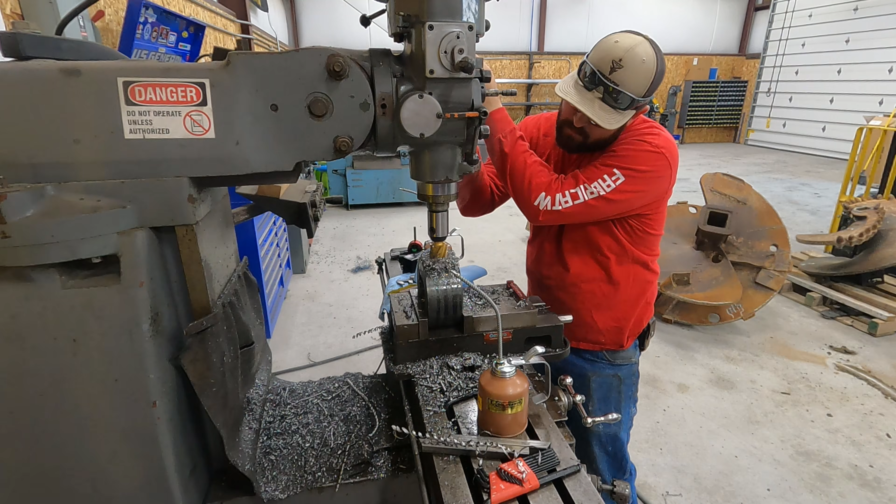So we got some 20-foot lengths of tube here. This is 3x5 tube, 1/4-inch wall, and we're gonna start a pretty big build today.

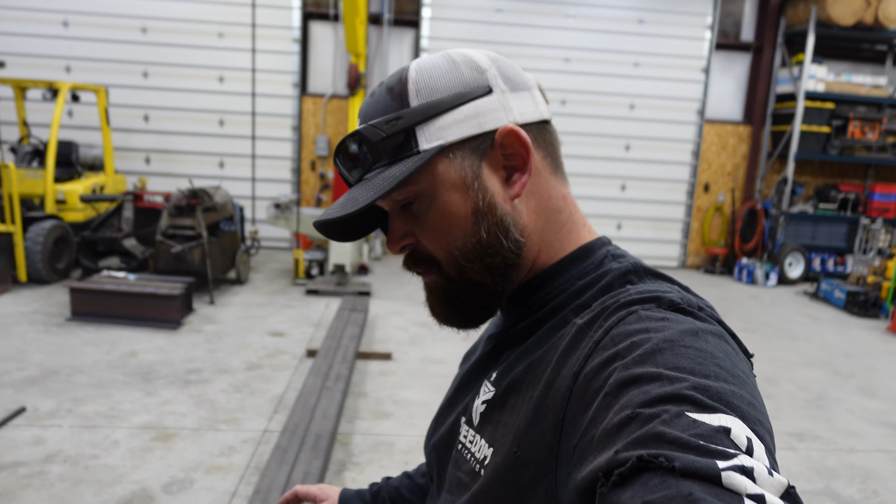This is a project I'm doing for a friend of mine, the same guy I built the wheel ditch filler implement for. He wants me to build him a trailer where he can put gravel or dirt into. It has a hopper and a hydraulic slide gate on the bottom, so he can drag it behind his tractor, open the gate, and fill the wheel ditches. That other implement I built him is great, but those tires track and move the material, so you lose it and end up with a big cavity, a big ditch. He needs to be able to fill material back into that ditch. That's the point of this build.

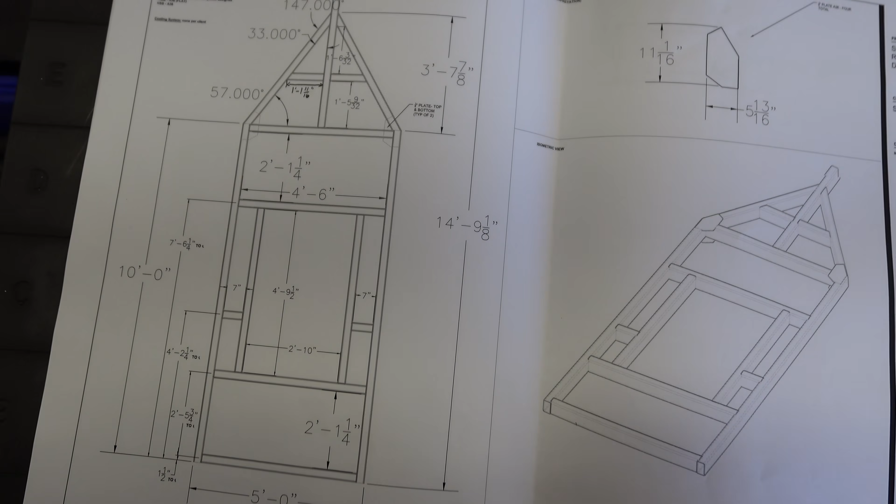Let's get started. We are going to get started on the wheel ditch filler trailer. I've got some drawings here, so that's kind of what we're dealing with. This is what it's going to look like, and I've got dimensions. So all that's left to do now, we're going to treat this just like every other project. I'm going to go through and get a cut list together, figure out what pieces I need, and start cutting parts. Sure wish I had that new bandsaw here, but can't wait, so got to get going.

So we'll go over to the saw and start cutting these.

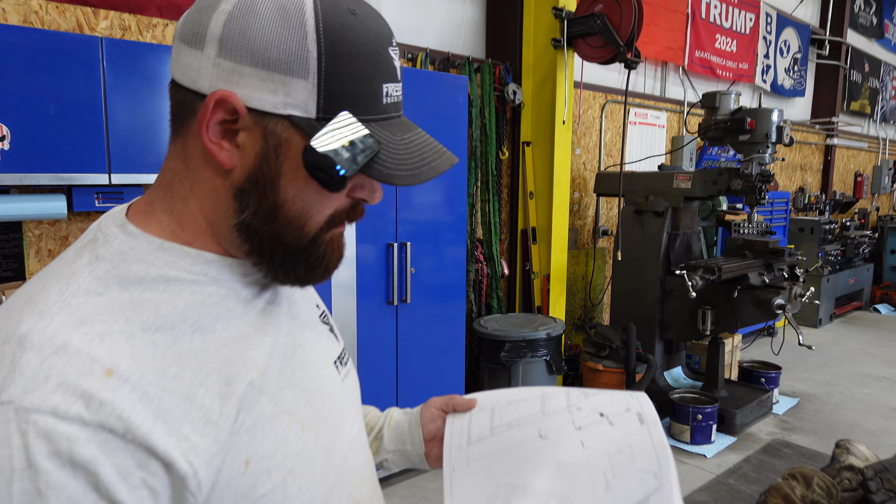Going on, guys, we're back at it today. Let me show you where we're at. We got all of our parts cut, so they're all just kind of waiting to be tacked up. But here's the issue we've run into. You can see that 3D model there.

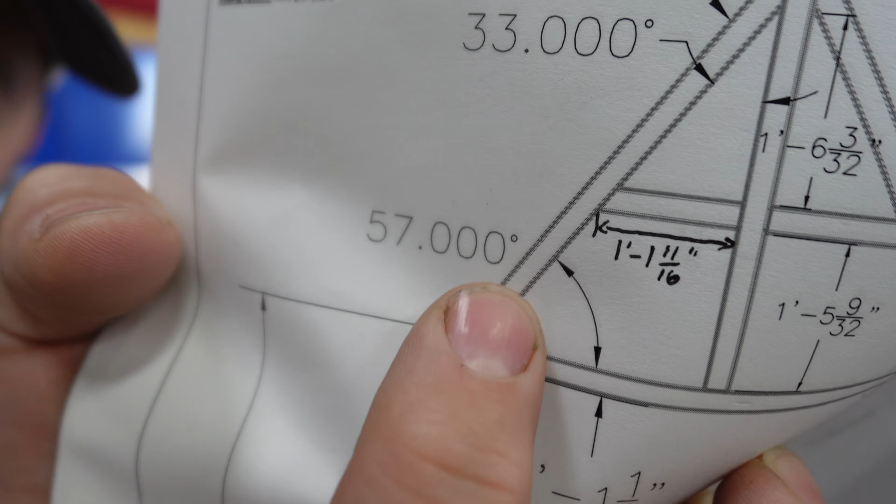If you look at the dimensions here in that drawing, hopefully you can see the way that corner's laid out. They didn't split the angle there. Where this piece meets this piece, that angle's not split. This piece is square, and then this piece has an angle to meet up with that one. The reason you don't want to do that is when this one meets up to this one, you're left with a cavity on the inside because it's turned on an angle, and it would be really hard to fill that in. You can kind of see what I'm seeing right there in the corner.

That's why you want to split the angle. Lucky for me, I was able to draft it up on my software to where they both meet, and I'll show you that, then split the angle. It's a 16.5 degree angle on both pieces. So when the 16.5 degree meets a 16.5 degree, they have a baby, and they make a 33 degree joint, basically. But I'll show you what I mean.

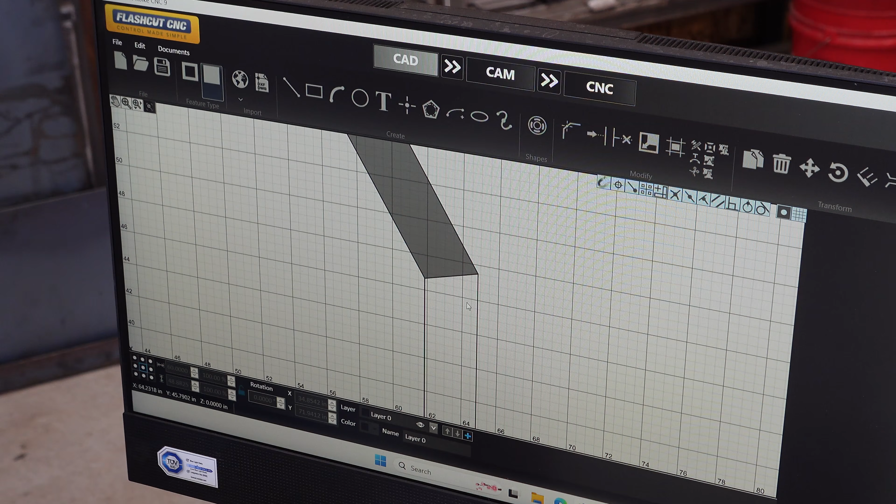So you can see here I've got my side piece, and it meets the tapered piece on the front of the trailer, and they split that angle. So you don't have a square one here with one that has a 33 degree, what did I say it was? Well, heck, I'll just show you. If I was to draft that right now, this kind of shows you. Okay, so I've split the angle. This is the angle, this is what both tubes are going to have. Both this piece and the bottom piece are going to have this 16.5 degree angle, and when they meet up together, that's going to make a 33 degree angle, basically.

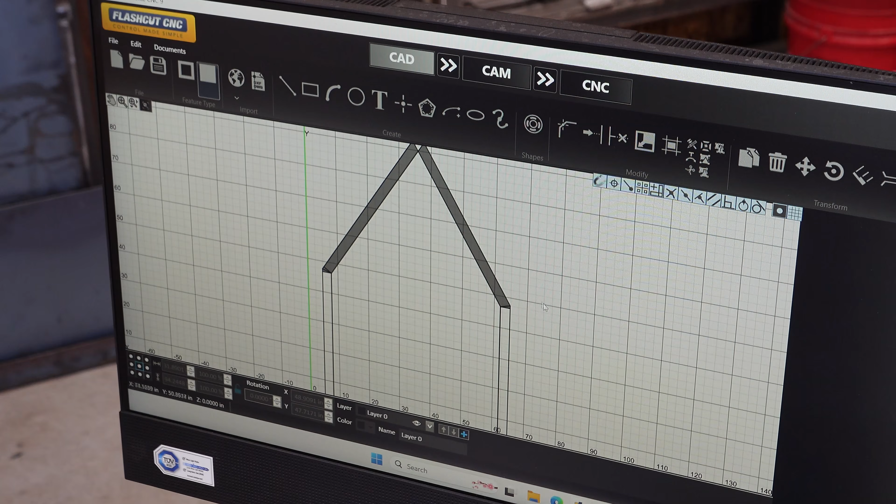Okay, if I was to do it the way it is in the drawing, let me show you what that would look like. So you've got your straight piece and the angled piece. If you only have one square one and one with an angle, then you're left with this big cavity here that you have to fill in.

That's no bueno. Typically when I build a trailer frame, I like everything to be sealed up. You don't want water getting in there because then it can freeze and expand and split the tube. It can rust out from the inside out. There's just a lot of reasons you don't want to do that. You want to seal it up. So we're going to change a few things.

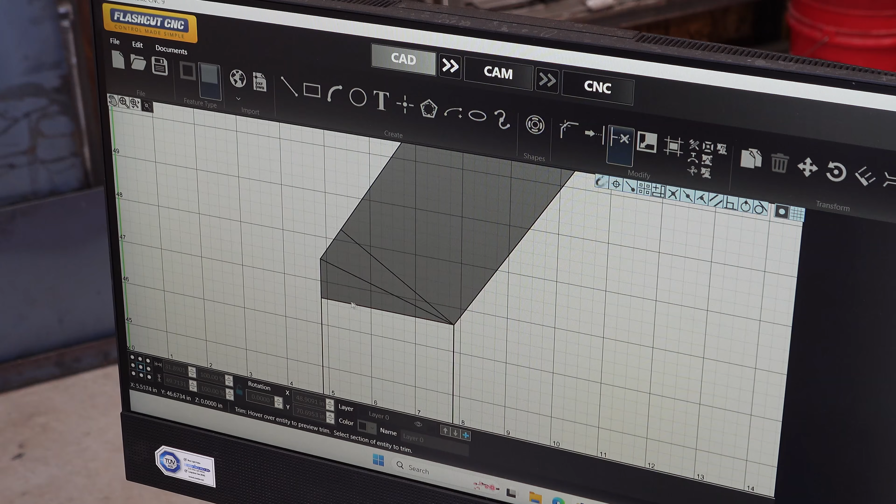This is one of the things we're going to change, and we're going to do it this way so we put the angle on both legs and they meet up and fit nicely like this, and then it will be a lot easier to weld as well.

So 16.5 degrees. Now we know what angle we need to cut these. We're probably going to have to cut that by hand. If I had that new fancy bandsaw, I'd be cutting it with that, but I don't, so looks like we're going old-fashioned.

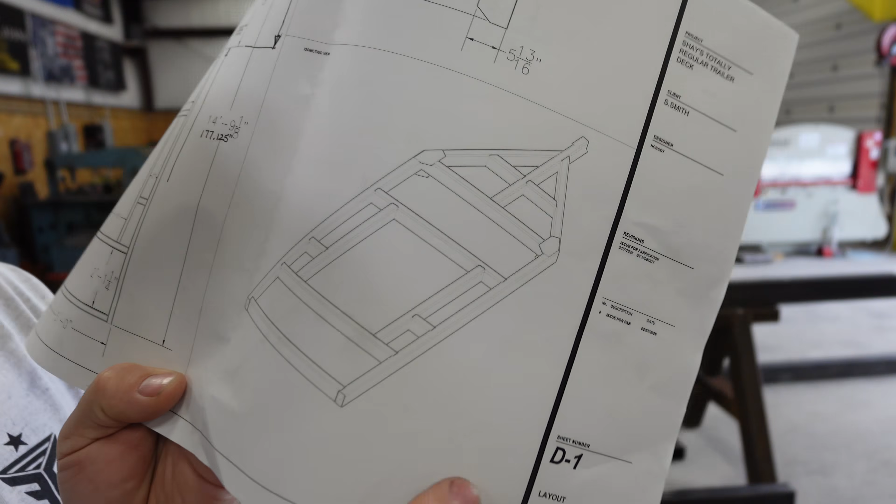Here's another thing we're going to change. If you look at this drawing, the 3D model shows these tubes being open, and this drawing does as well. You can see they just ran the tube to the end, leaving the end open. We don't want to do that. We want to 45 those corners and be able to seal that up. So that's what we're going to do.

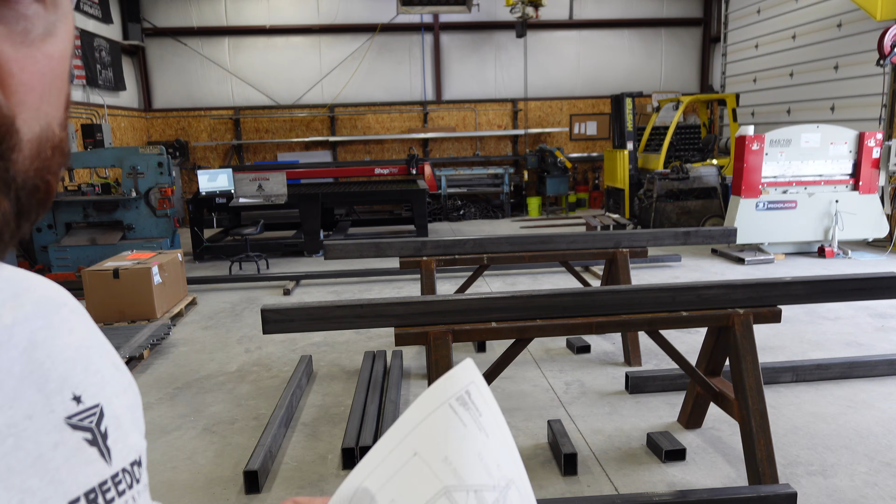I'm going to get set up real quick. I've got a torch, I'm going to cut them with a torch, going real old school. You could cut these with a zip disc, but then you got to listen to all that. I'm just going to cut it with a torch, then we'll clean it up with a grinder. I guess we'll listen to it anyway, but not quite as much. Let me get all set up, and we'll come back to you when we're ready to cut these.

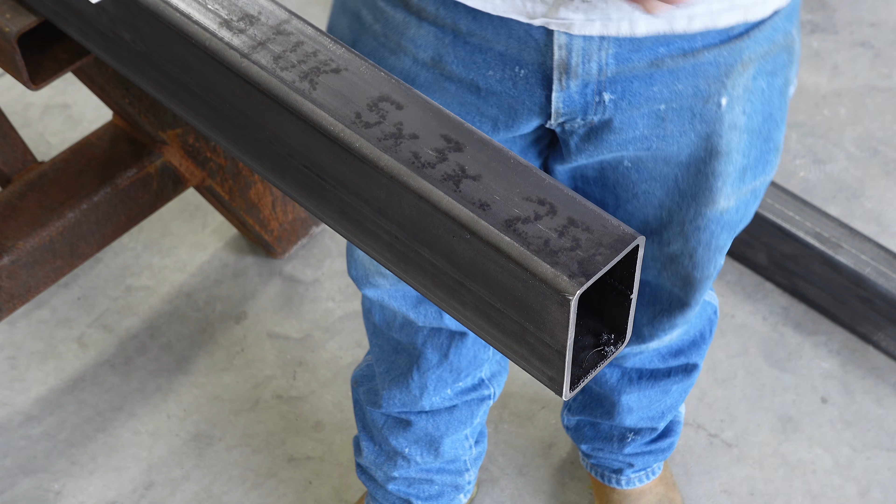I want to show you how I'm going to lay these out. We'll just lay this one out together, and then I'm going to go through and cut them all, since it's pretty much the same process for all of them. We know our angle needs to have this be the long side and this the short side. I've got 16.5 degrees on my protractor here.

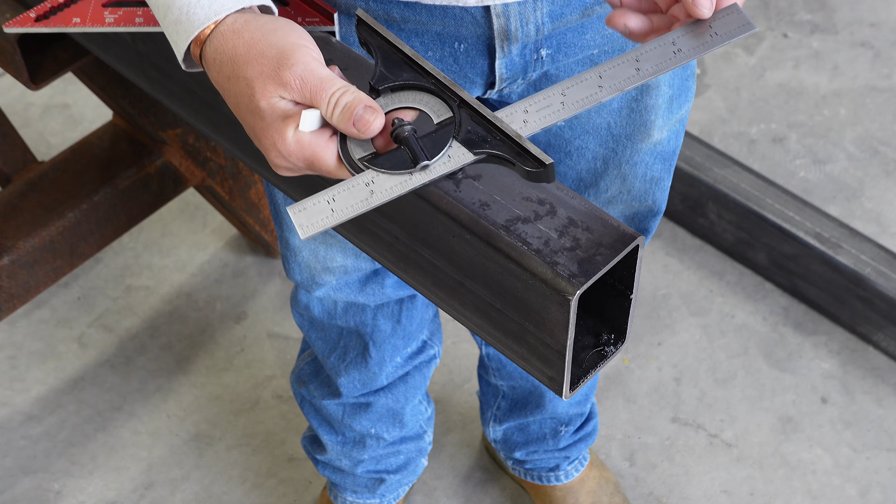So we need to lay this out like this. I'm going to take this and make sure that this edge is tangent with this corner. I take a nice sharp soapstone and I just lay that out there. This is going to be a straight line, so I'm going to lay this out. And then you always want to make sure that you lay it out the same way, meaning you don't want to have one going this way and one going this way on the other side.

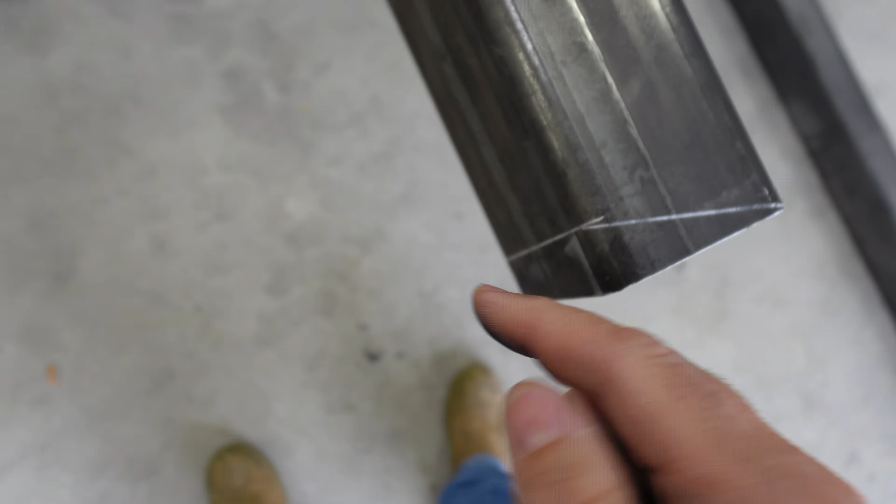So then I'll show you what you're left with. You can see it hits right on the edge of this tube here. Angle comes down, meets up with your square line, and then same thing here. Okay, so that one's ready to cut.

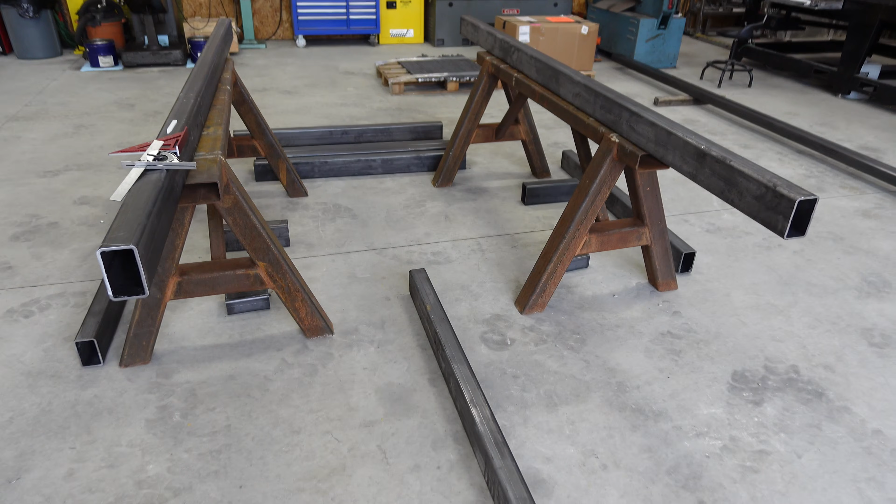I'm going to lay those all out the same way. I'm going to lay this one out, and I'm going to lay that one out. I actually haven't cut the two angle pieces here because I wanted to lay it out on the computer and get a distance, because when you do this kind of angle versus what was on the drawing, that's going to change the length. Now that I have it drawn on the computer, I can pull a measurement, see what these lengths are, and cut those to length. So I'm going to also do that.

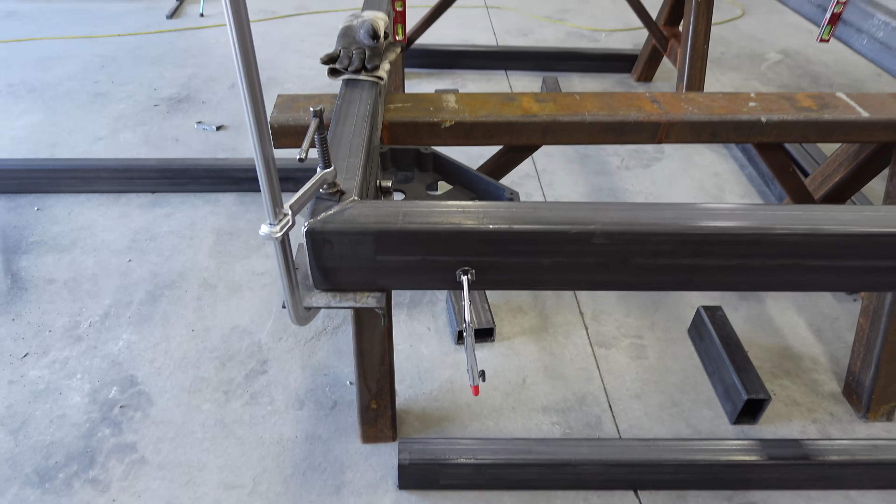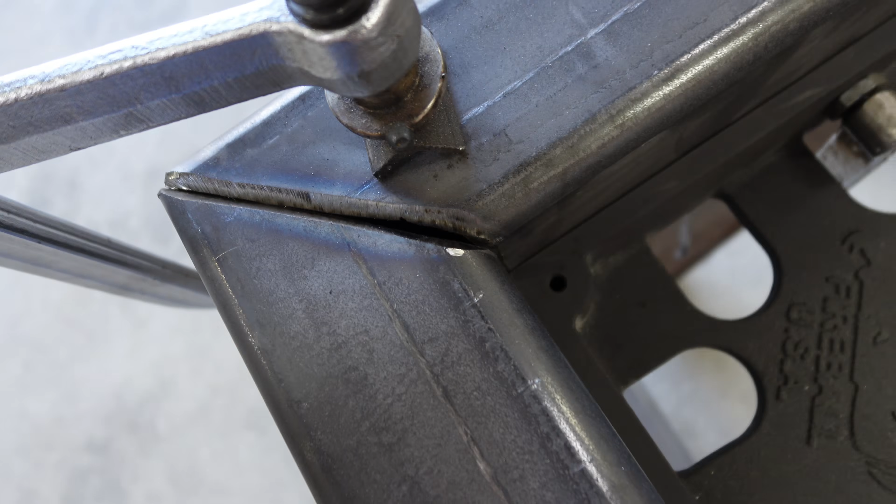Starting to fit this frame. You can see I've turned my long pieces on the sawhorses. I got a couple pieces of plate clamped to the bottom here, got my trusty fireball square there, we're going to use that to fit up these corners. Getting some pretty good joints. You can see there's a little bit of gap there, but we'll be able to fill that.

I got some levels on it to make sure everything's level. These sawhorses aren't going to be perfect, the floor is not perfect, so there's a lot of variables here. We're going to go ahead and keep everything level, and check everything to avoid twisting this frame as we fit it. We'll just kind of work our way around.

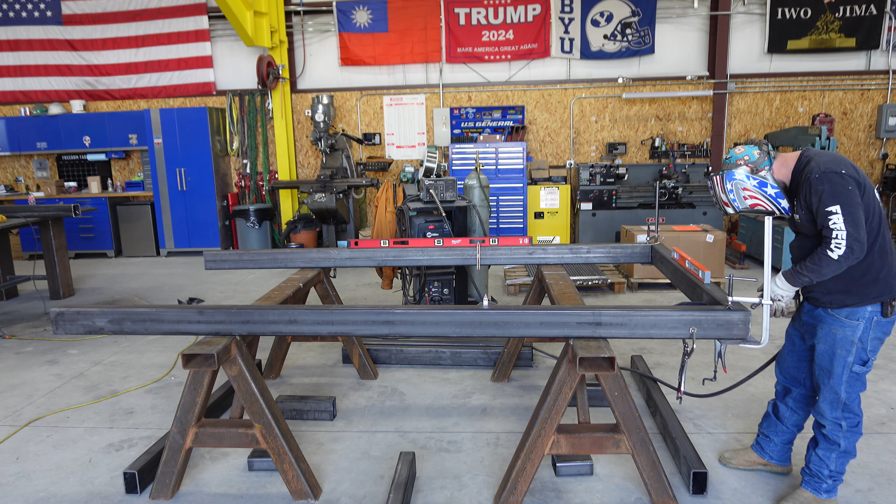Put some good tacks on it. Sometimes I'll use these little brass wedges to level things up if I need to.

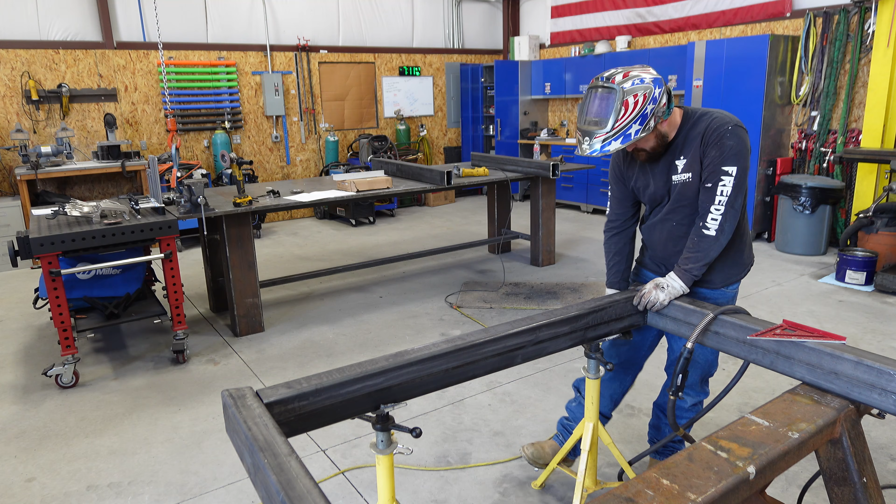Alright, so here's the next one that's going to go in place. It's going to make it kind of tough to get this welded up on the inside, but I think we can still get to it. I do want to get this in place. I'm going to hold it back just a little bit. I don't believe this is a crucial measurement - I checked the plans, this can float just a little bit. All it is, is a cross brace.

So I'm just going to get a tack on it to start. There we go, tack the same side. The other thing I want to check is straight up and down. A lot of times when I'm fitting iron, I like to use a dead blow hammer because it's not near as hard on your ears, but you can still get things to move pretty good.

Alright, we got us a rectangle. Now I need to go around and check my levels, make sure nothing's moved. This is still good - okay, everything's looking good so far.

Now we're ready to start fitting the tongue. I'm going to grab some more pipe stands, we'll set these two in here, start finagling these. Alright, so now we're working on the tongue. I've got a level on it. Clamped a piece of plate here, so I've got my tongue piece set on that plate. I've centered this.

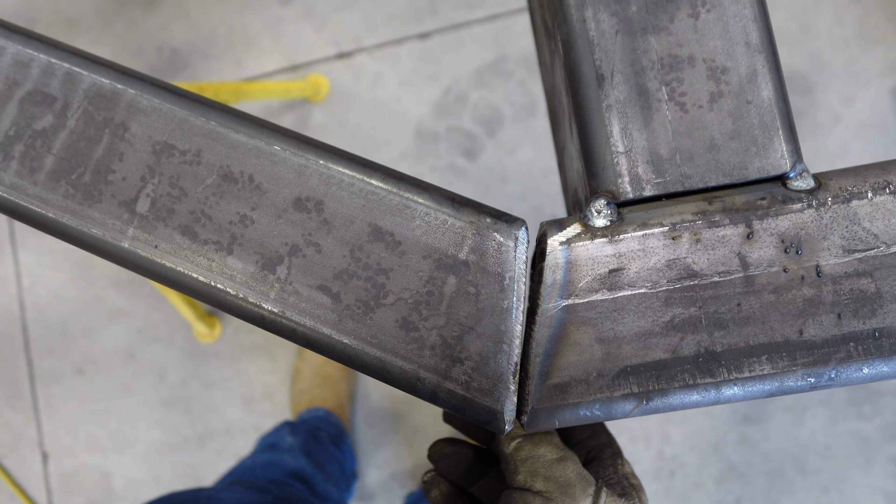Alright, quick update, let's show you guys what we got here. We are going to have to correct an issue, so I'll show you guys what we got. Okay, so we got these angle pieces in place. Now if you look here on this end, you can see there's a gap on the inside right here. And if you come down here on the heel, you can see the heel is touching, but it is not here.

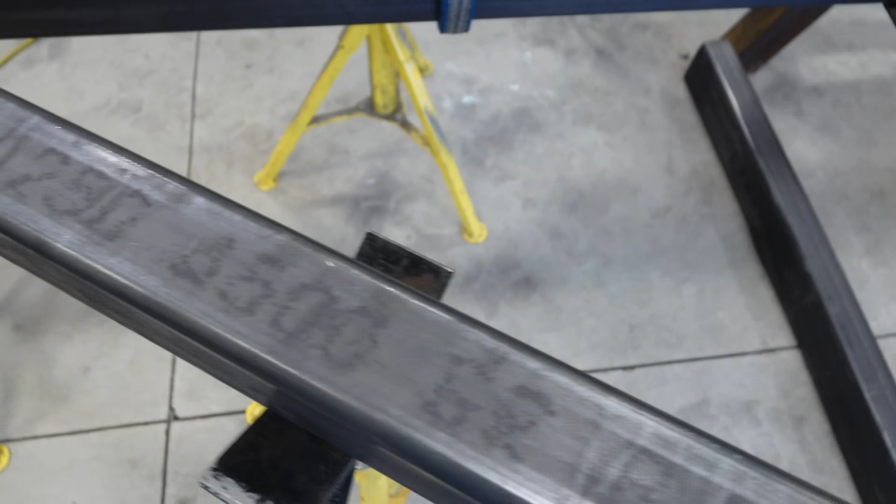So I'm going to take this distance, what that gap is, and I'm going to trim it down on the heel, and it's consistent. This one's the same way. Okay, so the heel hits, there's about a quarter inch gap there. Same thing there. Now the good thing is, once I trim that heel and make this parallel, when I close that up, it's also going to close this gap up. So hopefully that'll fix it.

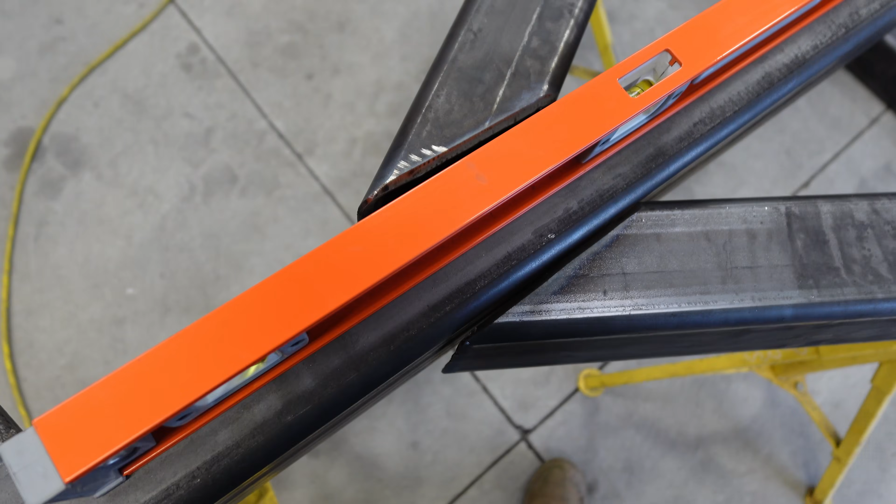So I'm going to get the torch out. I'm going to whittle this off on the heel side here, and then I'll go ahead and clean it up with a grinder, and we'll come back and show you guys what it looks like.

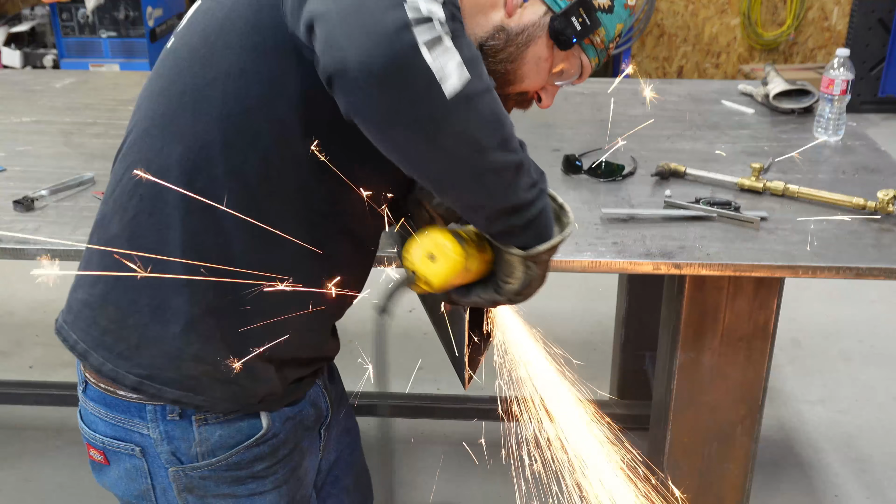Okay, we've got this in place. It did close this up a little bit. Still a little bit of gap, but it's weldable. This side looks beautiful.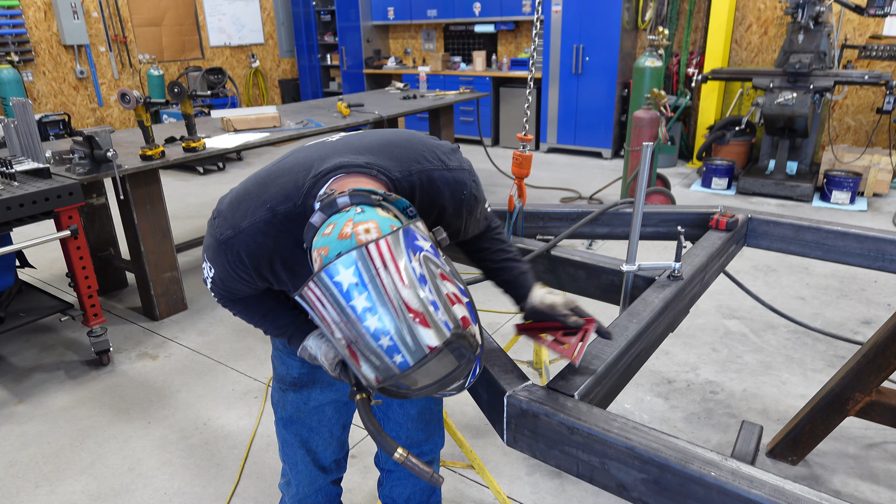Alright guys, you can see we've got these two internal supports tacked in place. I'm working on getting these smaller ones tacked in place. It is snug as a bug in a rug. Whoa - until you get to the bottom.

I'll tell you what, if things don't work out with the farming thing, I'll bet the circus would hire him out. He could haul elephants with this sucker, because it is built. This thing is built for some weight. Just the frame alone is freaking heavy. It's the first piece I haven't had to trim or grind.

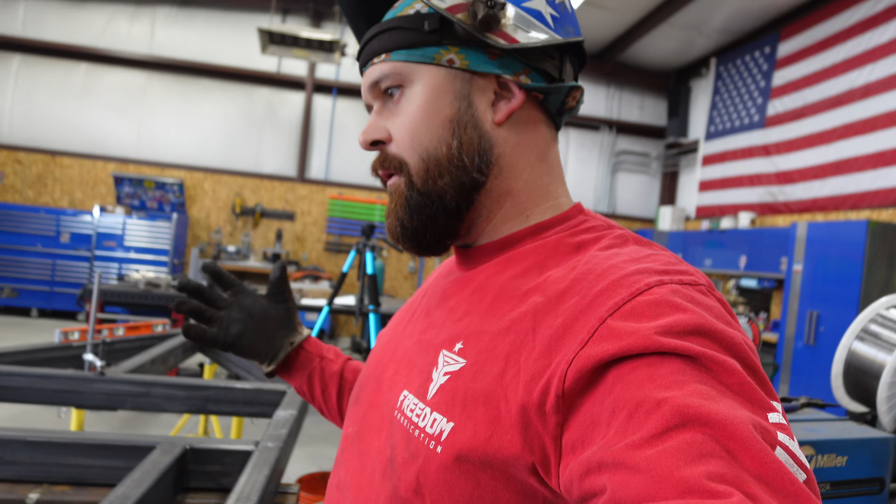Alright, something else I want to throw out there. I know I've brought this up before, but I'm going to bring it up again. So when you tack something like this, it's always a good idea to put your tacks where you can get a zip disc into, in case you need to cut it apart and shift something or pull something back square or whatever. I know, because I've had to do it way too many times. If you put your tacks where you can get to them, then it's not as big a deal. You can hurry and cut your tacks, pull things back square, retack it, and keep rolling.

But if you even put just one tack in a bad place where you can't get to it, now it turns into a whole fiasco. Because one tack can hold things a lot better than you think. So just make sure when you're tacking stuff like this together, you put those tacks where you can get to them - always on the corners, so I can get a zip disc in there.

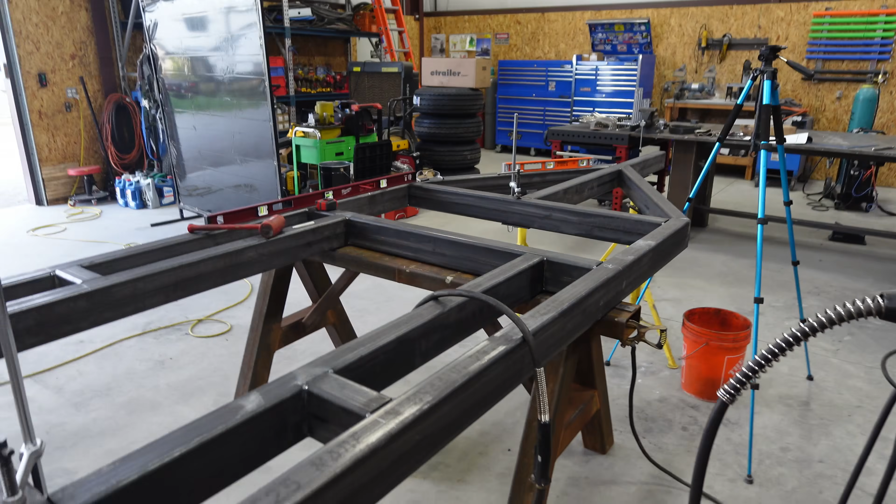Okay, so the next order of business, I've got two supports that go in the tongue here. I mean, I'm telling you guys, this thing is built. So there's two pieces that go in here, and I'm going to have to miter the piece that butts up against this support. So we'll get those all prepped up, and then we'll come back to you.

Alright guys, I figured this was probably worth showing. For something like this, if you wanted to put a support in here, you need to figure out this angle.

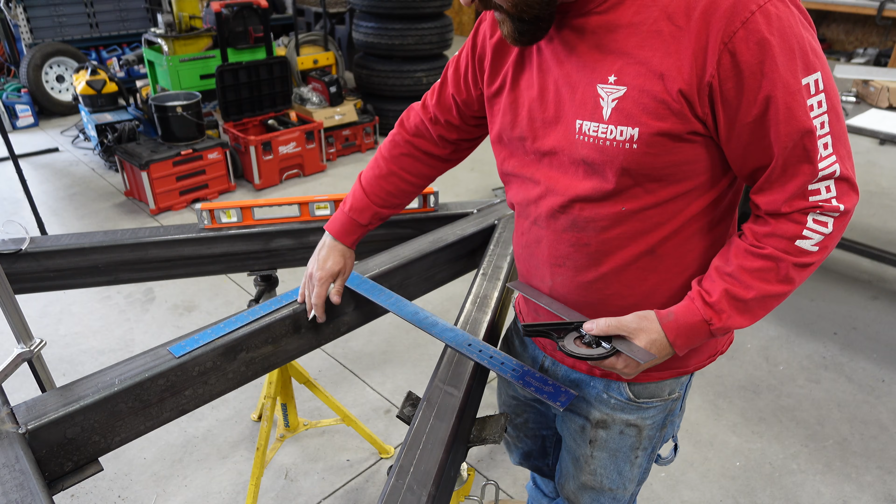This is the way I figured it out. There's lots of different ways you could do this, this is just the way I decided to do it. So I held this square here. You can do it either way, hold it square here or here. So I held it square.

Then I took my protractor and held it up against the square, and I was able to check and see that the blade on my protractor was on the correct angle. So I just lined it up with the inside of the tube here, carefully tightened the screws, and ended up getting 32 degrees. So this is a 32-degree angle off the end.

So now we can go over, mark our tube with our 32-degree miter, and we'll be able to cut that and slap those in place.

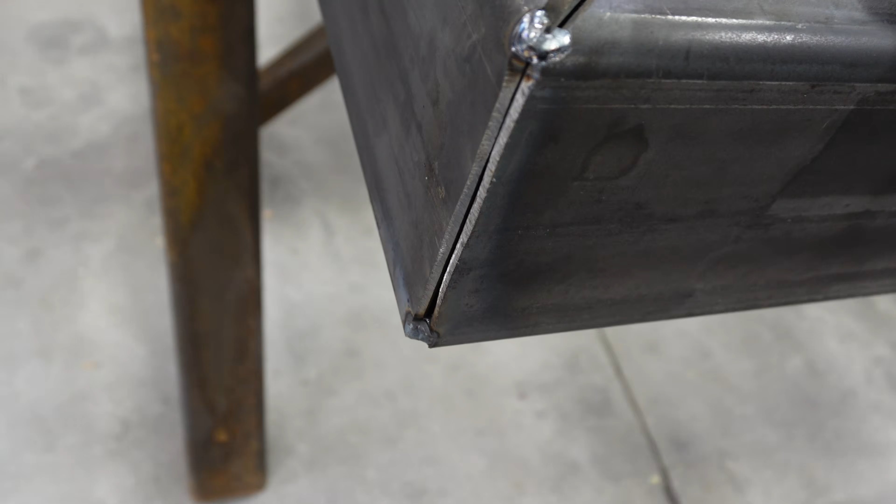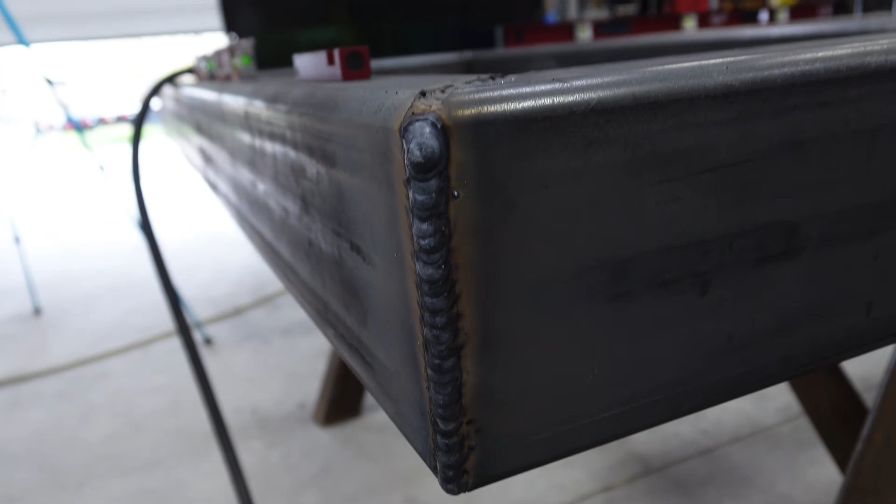On these outside corners, that one looks pretty good, pretty tight, but I'll trigger that one up as well, and then maybe clean it up with a flap disc. If I still don't like how it looks, I'll run another one over the top, and I'll trigger it. But it ends up looking pretty decent. Here's one that I triggered, so you can see it gives it a stacked dime look, and then I clean it up with a flap disc. That's how I handle that type of situation.

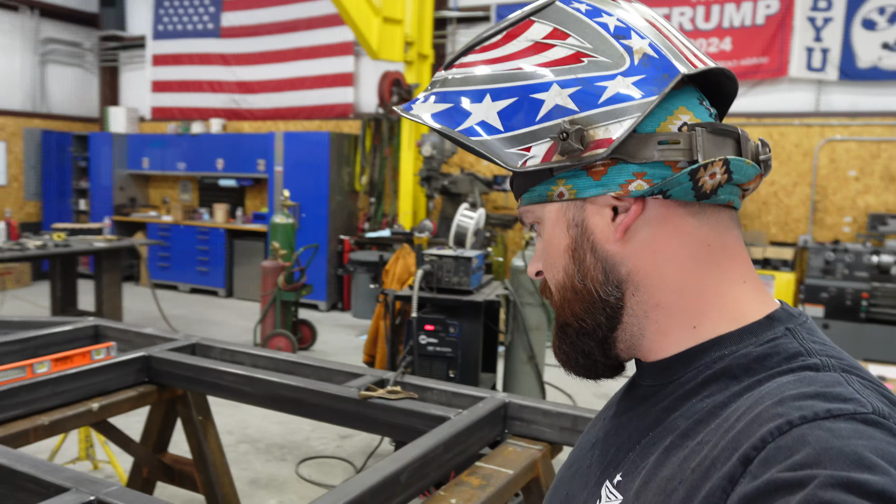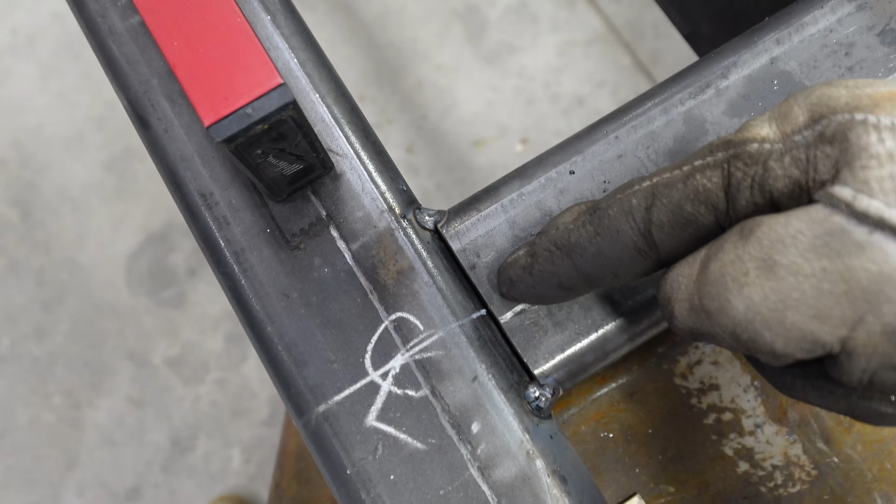Dealing with gap is something you're going to run into. When you have a T-joint like this one with tube, the way I run these is I run one on this corner. I tip my gun this way and favor this tube, because it's not going to blow out if I'm directing my heat here. Then I let it wash into this. Typically that's not enough to fill up this joint, so I'll angle the gun this way and run this one. If it's still a little concave, I'll run another pretty one over the top of it. So I just wanted to give you guys some info on how I do it.

I'm going to throw on the meta glasses and see if I can video how I run this one, and hopefully it'll be clear enough that you guys can see it. Let me go grab them and we'll show you guys.

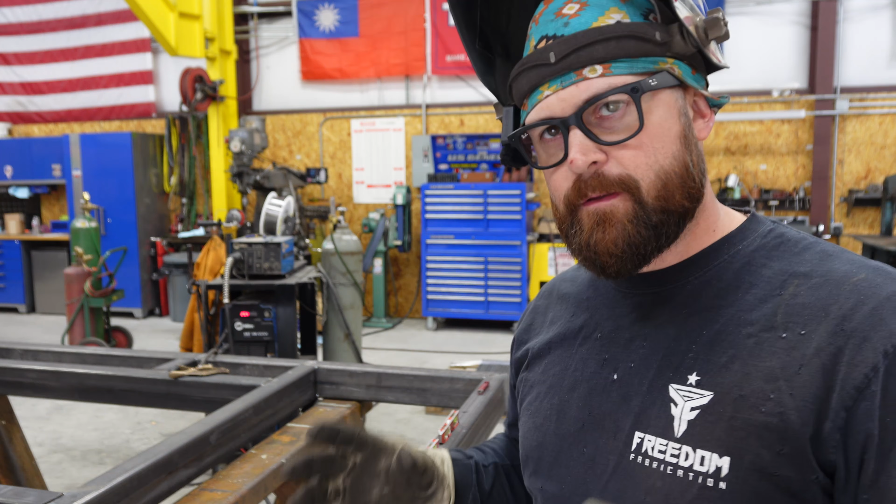Okay, so I got the glasses on. The only way you guys can really see what I'm doing with these glasses is if I have a brand new lens in my hood, so I've changed both lenses, inside and outside. Hopefully it's clear enough that you guys can see what I'm doing, so we'll see if we can get some video of this.

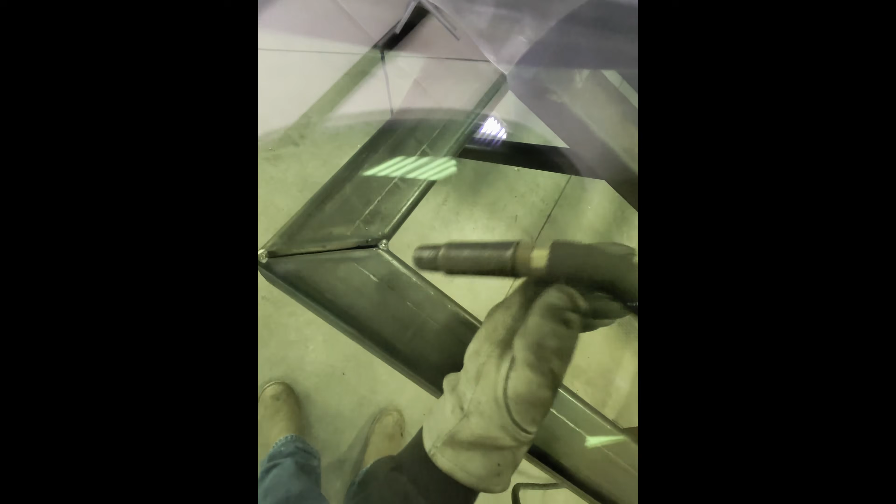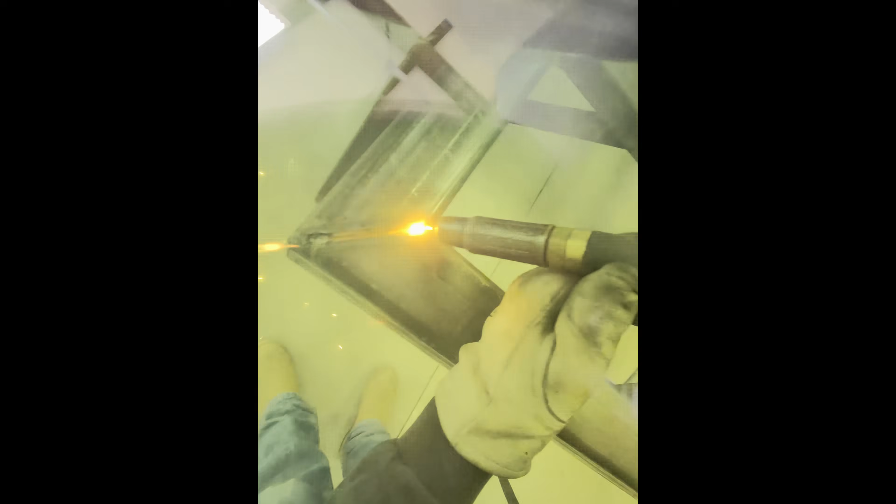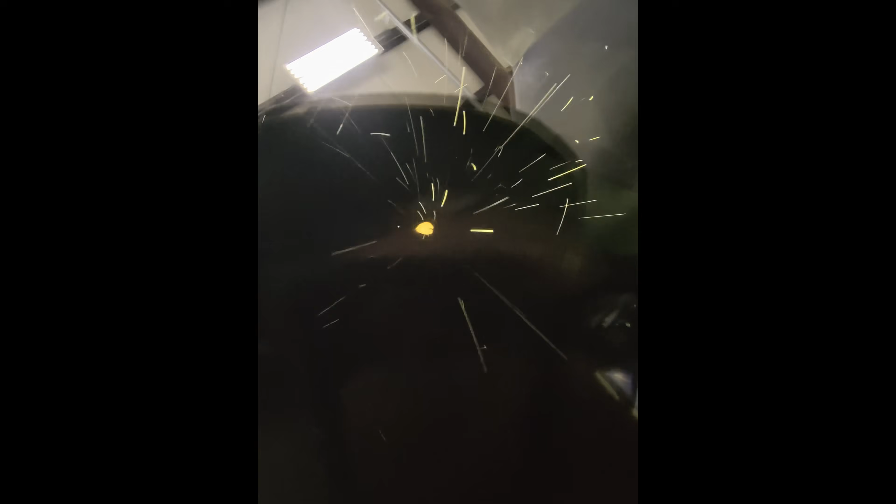Okay, so I'm just going to start here. Put a tack, put a tack, put a tack, put a tack. See how it kind of gets really close to blowing through? That's why I just trigger this up, go back and forth. The reason I go back and forth is while I'm over here, this one's cooling, so it gives each tack a chance to cool.

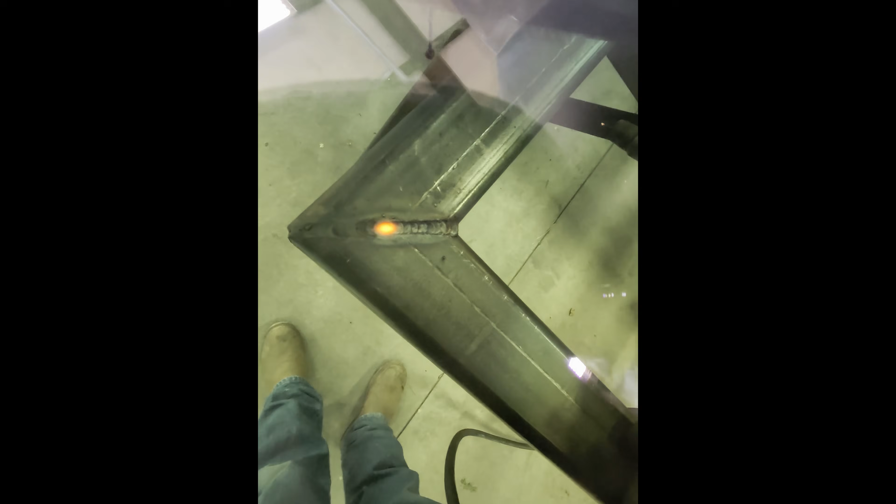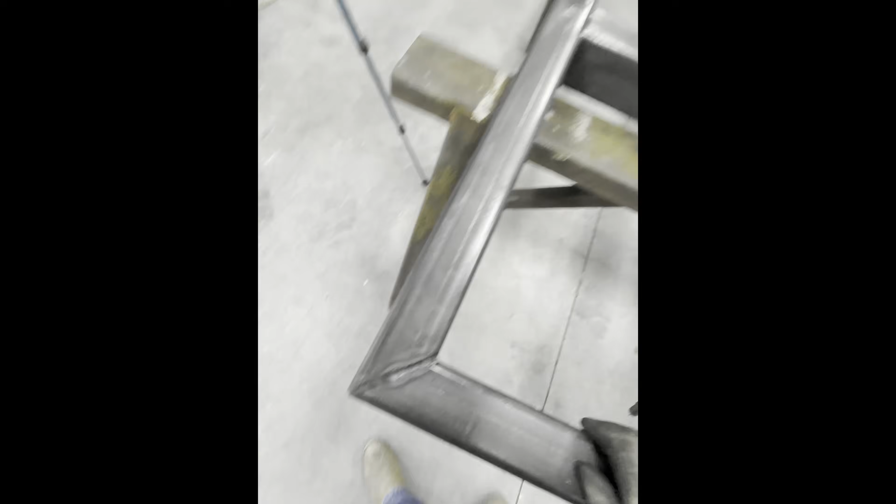Okay, now you can see what that looks like. Now I'll take a grinder and grind that out, make sure I knock all the slag off, and then we'll show you guys what it looks like. Okay, so you can see that's nothing to write home about, but I did grind that out. I think I am going to hit that just a little bit more.

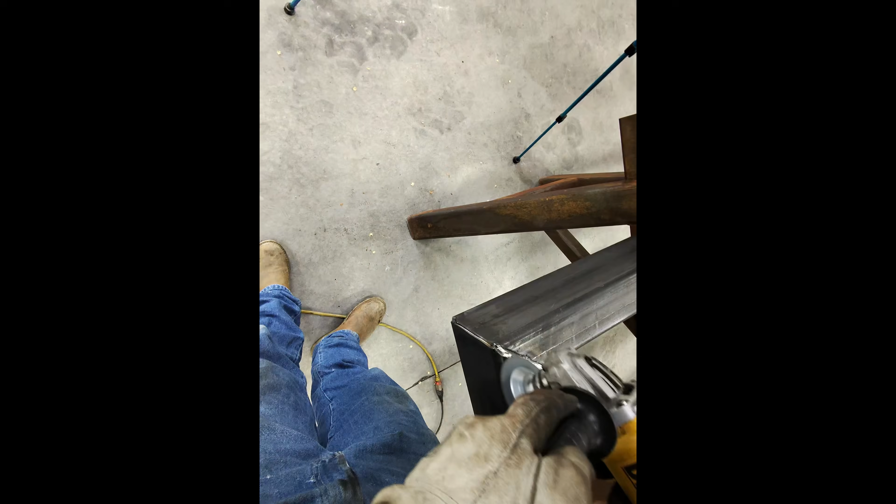Don't mind this little bit. All right, so I got that. Okay, so I got this all gouged out. Now I'm going to run a pretty one over the top of it, and I don't have to worry about it blowing through. Okay, so here we go.

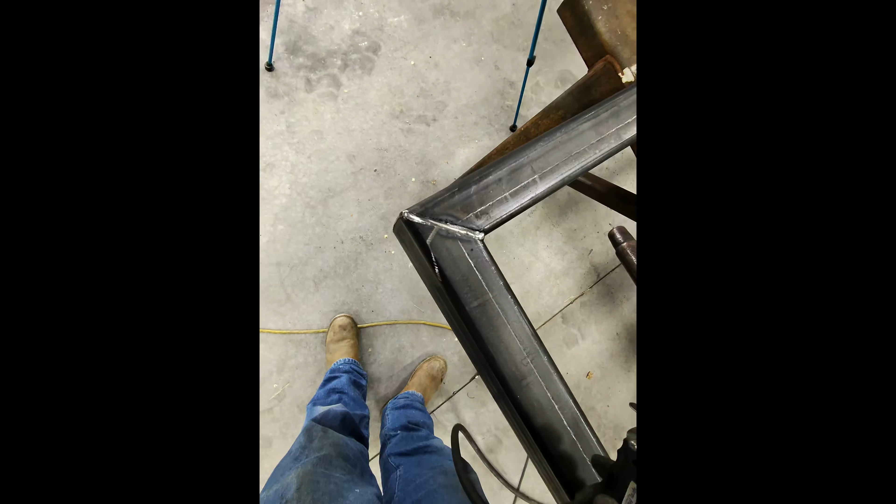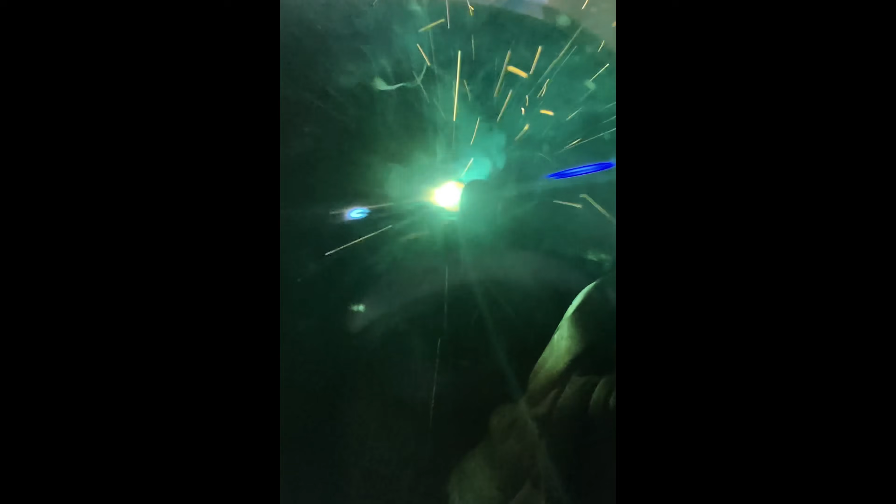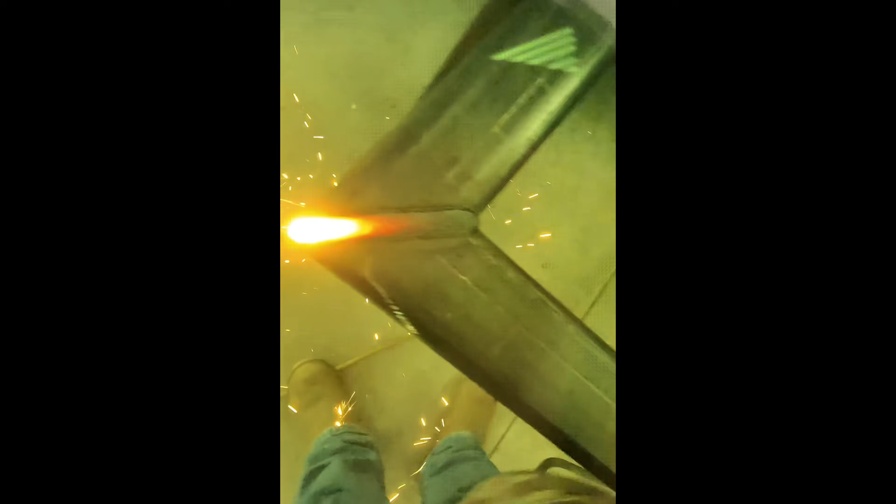Just got to make sure I pause and let that fill up. You don't want any undercut, so you got to make sure you let it fill up.

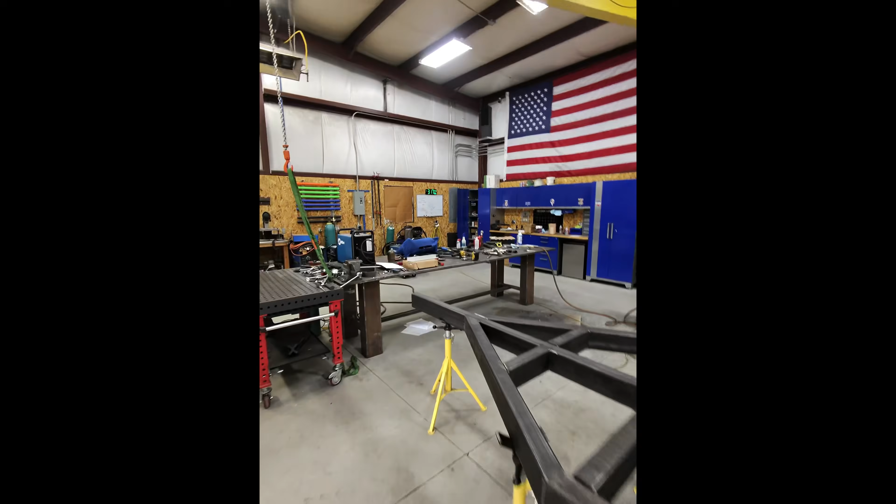Okay, so we'll let that cool. I'm going to grab a wire wheel for the spatter. Take my fireball scraper, knock the spatter off.

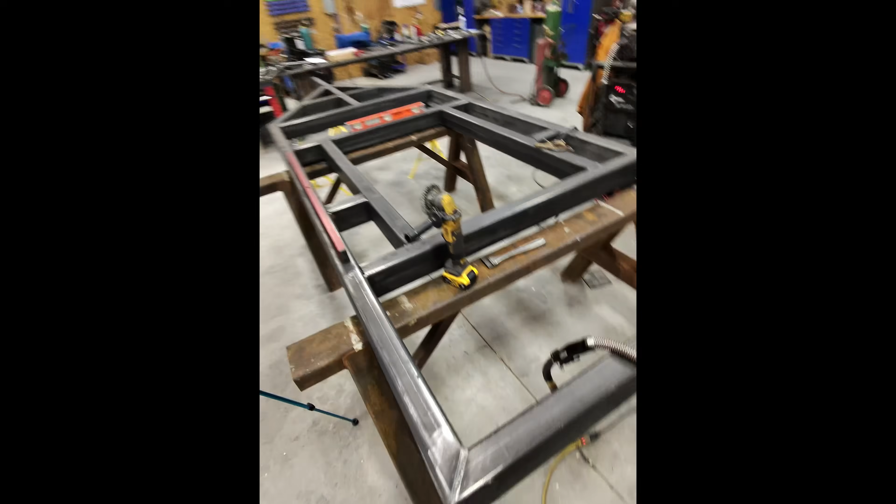Okay, so there's what we're looking at. You see it's nice and convex, I don't have any undercut. Everything looks good there, and that is solid. So that's kind of what we're going for. Okay, so that's how I do it. Hope you guys got something out of that. All right, let's see if we can get this welded out.